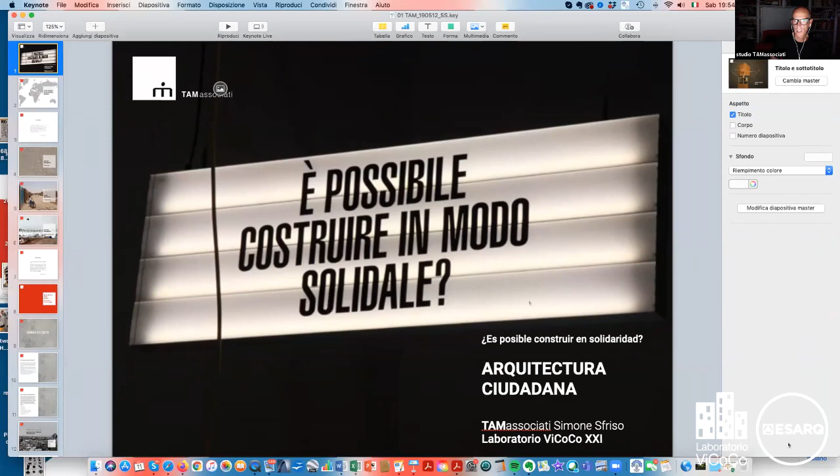Well, I can share my desktop. Okay, can you see my desktop? Yes. Okay, very well. So again, thank you for your kind invitation.

I am one of the founding partners of TAMassociati. TAMassociati is a firm based in Venice, Italy, founded in the late 90s. In the last 20 years we have worked mainly in the Global South, in the African continent, but also in the Middle East, Afghanistan, Iraq, and we have also done some projects in Ecuador and Nicaragua.

So we have worked mainly on what are called the global boundaries, las fronteras globales. But first of all, I would like to talk about what it means for us the word boundary, or frontera. I've tried to translate it in Spanish, I hope it is correct Spanish. But what is a boundary?

This is a quote of Massimo Arcangeli, who is an Italian intellectual and glottologist. He says that la frontera se divide, pero también es etimológicamente un lugar de intercambio. Se confina con alguien, ese alguien me une. Podré verlo y él podrá verme, y lo que importa es si estamos sobre el mismo nivel. No estamos confinados, de lo contrario sería un confinamiento, sino vecinos.

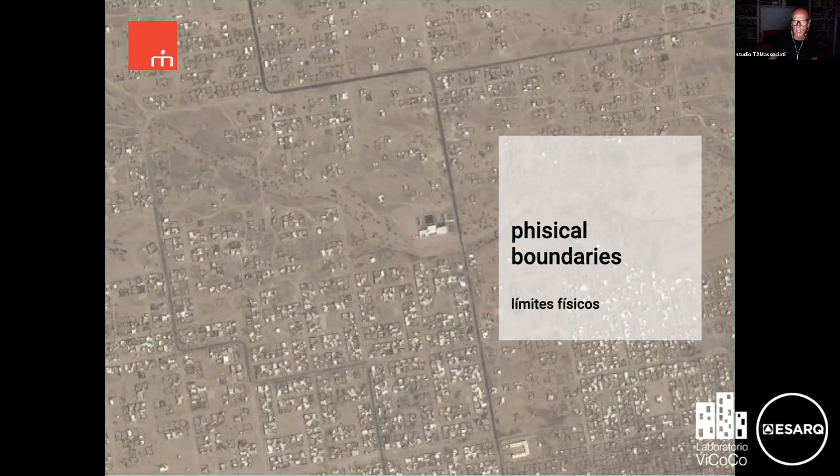When I talk about boundaries, I talk about physical boundaries, but mainly about social boundaries and also war-torn boundaries. We have worked in war-torn areas such as Syria, Sierra Leone, Iraq, places where all rights are denied to the communities, to the people.

So what is important is to try, with our work, to build bridges, to bring rights, to bring services, to bring an attempt of building the quality of life — the same quality of life that we normally achieve in our part of the world, in the north, in Europe — and to guarantee, through our social engagement, dialogue, service, and rights to the communities and places in which we are involved in our work.

We have worked mainly for NGOs, for pro bono associations, and so we have started this back and forth journey from the north to the south. It has meant for us a sort of relearning how to be architects, but also relearning how to be citizens, how to be involved with the community.

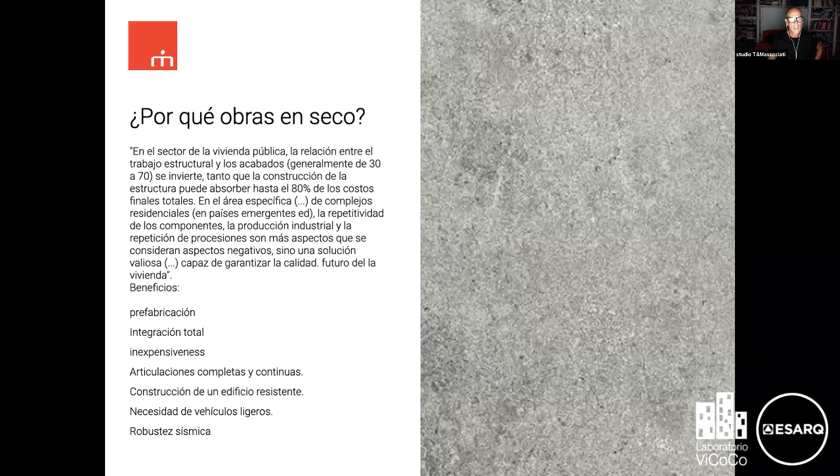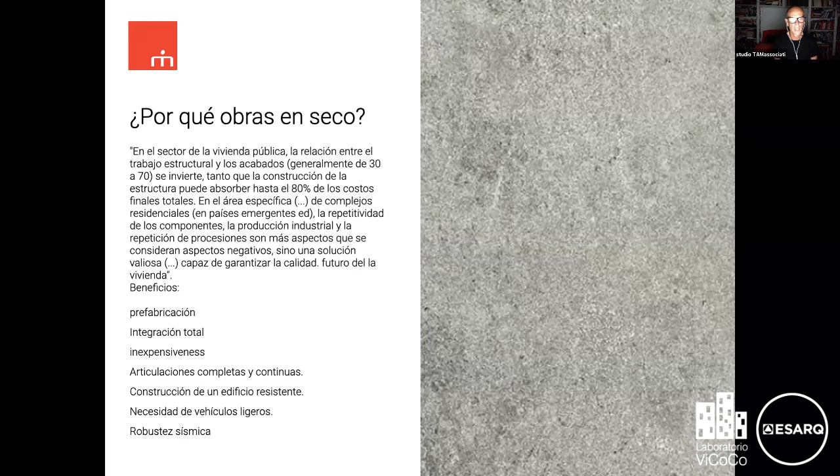So I've talked about prefabricación, integración total, inexpensiveness, la construcción de un edificio resistente, la robustez sísmica as well. It means that we can really try to give, using industrial production and the repetitivity of industrial components, effectiveness in our answers to the question.

This is an experimental research project for the reconstruction of a district in Kabun. Kabun is a district in Damascus, the capital of Syria. As you probably know, Syria has been shattered in the last six years by a civil war, and big parts of the country have been destroyed. Damascus, the capital, has also been a war-torn area, a war theater. Kabun, this district, has been hit hard by the war, by the bombs.

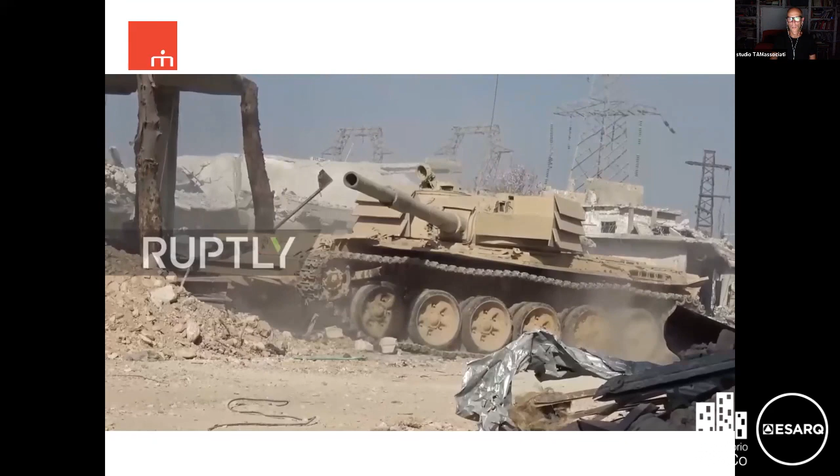So we have had to deal with huge problems of displacement, huge problems of refugees, persons who needed to go back to their city, to their neighborhood, as fast as possible. The attempt was to guarantee the same quality of life, the same feeling of genius loci in a place that has been completely destroyed.

This is why we have entitled this project 'Igual igual pero diferente.' It means that we have tried to learn from the genius loci. We have tried to start from understanding deeply how people were used to living—it was deep research about the typical Arab house, the courtyard house.

We looked at how to repurpose that typology also in huge residential interventions such as this, where we were asked to design an entire district. So we proposed a project based on possible variations, based on a basic model and a standardization of solutions, with the objective of developing solutions and strategies capable of transforming a very simple construction system into architecture.

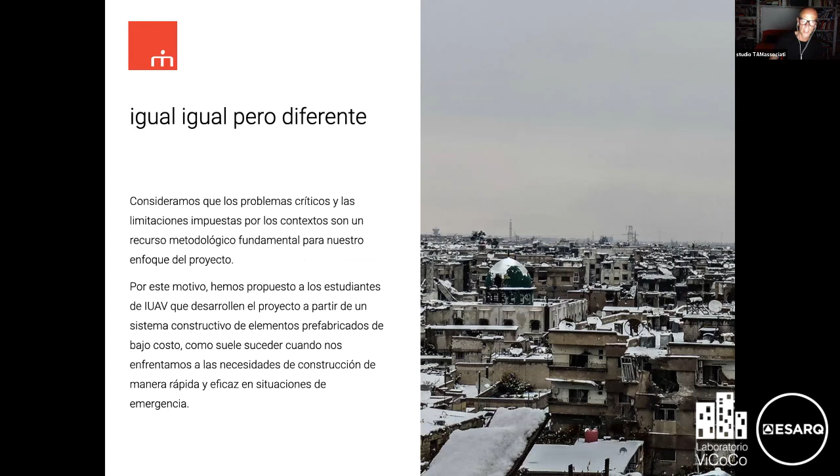We have articulated the project in 4 steps. The first step is the unit, the basic module of housing realized with prefabricated panel systems. Then the cluster, the aggregation of different kinds of modules of housing. Then the neighborhood, the aggregation of a certain number of clusters. And finally the district, made of 4 neighborhoods for a total community of 2,000 inhabitants.

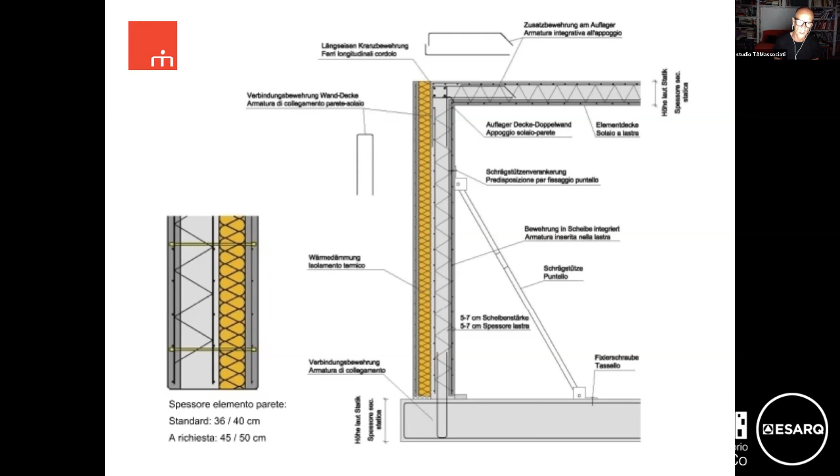We have standardized the thickness of the walls to give very good answers in terms of sustainability, solar radiation, and insulation. You have to consider that Syria is a place where in summer you can have even more than 40 degrees, but in winter sometimes the temperature goes down to 0 degrees. So you have a very wide range of temperatures from summer to winter, and you have to be very careful about the quality of building and insulation.

As you can see, we started with this basic model, 18 square meters, and from that we tried to assemble and combine different kinds of houses. Type A, 58 square meters, type B, 80 square meters, and type C, 120 square meters, for 2, 4, plus 1 people, and a bigger house, 124 plus 2 people.

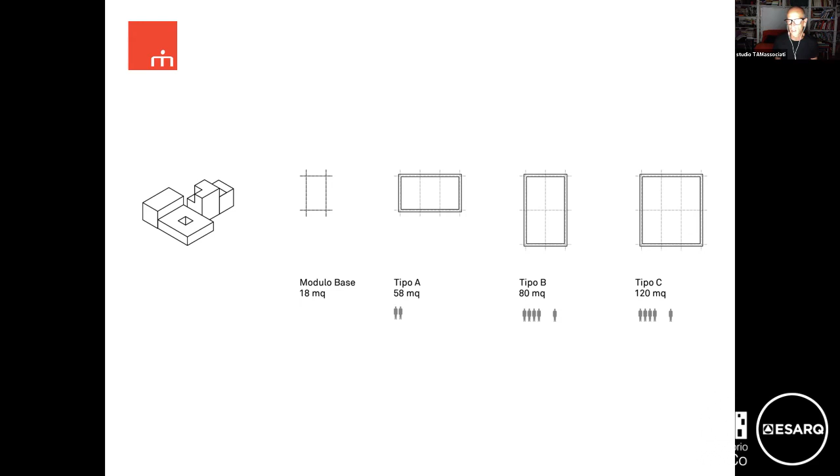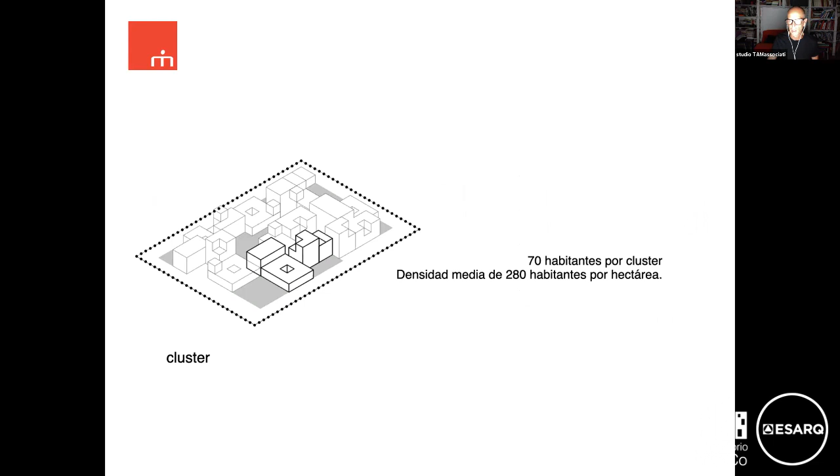So every cluster hosts 70 inhabitants. That means we have a medium density of 280 inhabitants per hectare. The attempt was to have a simple system, but the challenge was to build complexity, to build variety with a very banal, modular system.

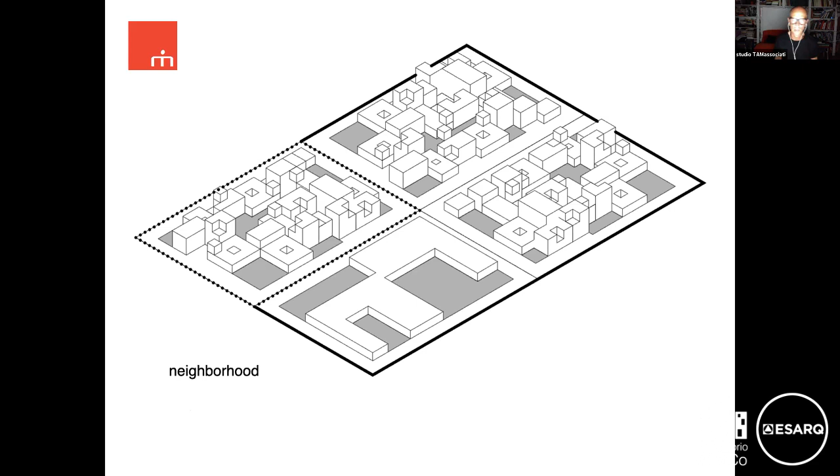So some instruments, the juxtaposition of different houses, were made in order to build richness and variety inside the neighborhood. We didn't want to build a boring place, a repetition of the same kind of house everywhere, but we tried to learn from the typical Arab kasbahs, and we tried to repropose a contemporary version of the Arab city, the Arab kasbah.

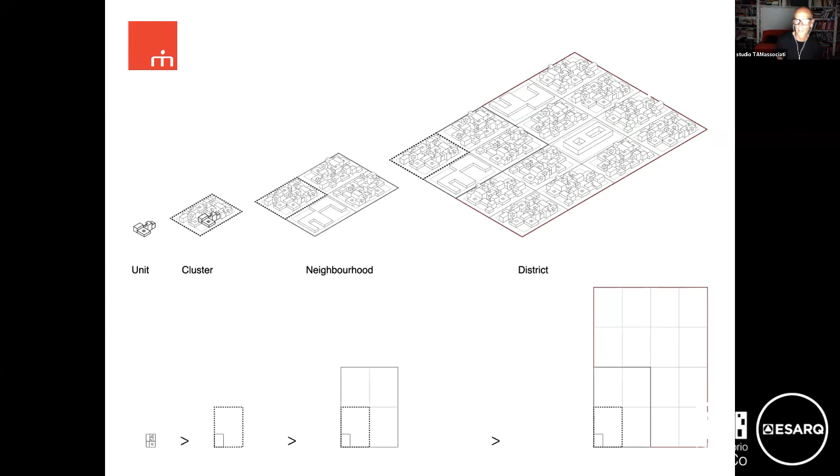So from the unit to the cluster, from the cluster to the neighborhood, and from the neighborhood to the district. I'm showing some schematic drawings. If you like, maybe in the next days I can send you some materials, some PDF files, if requested.

So now I'm showing you some variations, some possibilities of this aggregating system. Every house has its own patio. The patio is very important for the Arab culture because it guarantees the privacy for the family, the privacy for the women. So we have worked on different levels of open air spaces.

The intimacy and privacy of the patio, the semi-public courtyard where 5, 6, 7 units are facing, and in the middle of the cluster, the square, the more public space, a space for the market, for social gathering, and so on.

So, different solutions. This is a feasibility project for a pediatric clinic. So even for a public building, we have worked on the same principles: the dimension of the courtyard, the dimension of the patio, and the capability of the system to be replicable in different solutions, but also for different uses, for houses, but also for public buildings as well. This is another shot of the project.

This is another variation. As you can see, small windows in the walls facing the exterior, and big windows in the private internal patios, in order to guarantee privacy and intimacy in the houses.

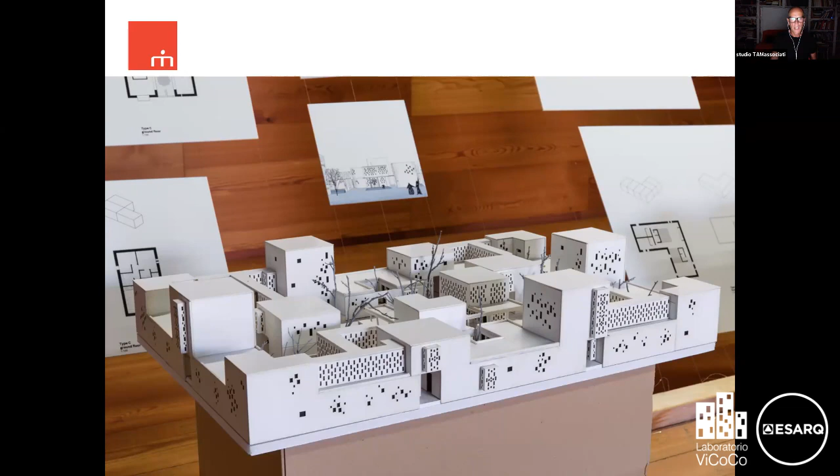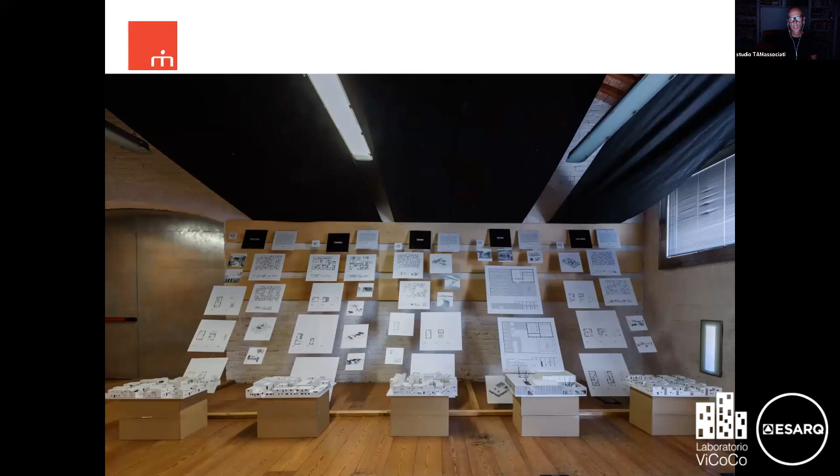Another master plan, we are changing social, physical, and also climate context. This is a social housing master plan in Yaoundé, the capital of Cameroon. Cameroon is in the equatorial area of the African continent. It is an emerging country, and the economy is growing faster, meaning there is a growing middle income class.

But there is also a huge demand for social housing for all the people moving from small settlements, from the villages, to the city. Again, the questions are really similar to the questions I talked about in the previous project. In this case, we have worked for an Italian building company and for the Ministry of Social Housing of Cameroon.

We were asked to design a master plan for 10,000 housing units, a new town, une ville nouvelle, for 45,000 inhabitants to be built with prefab systems.

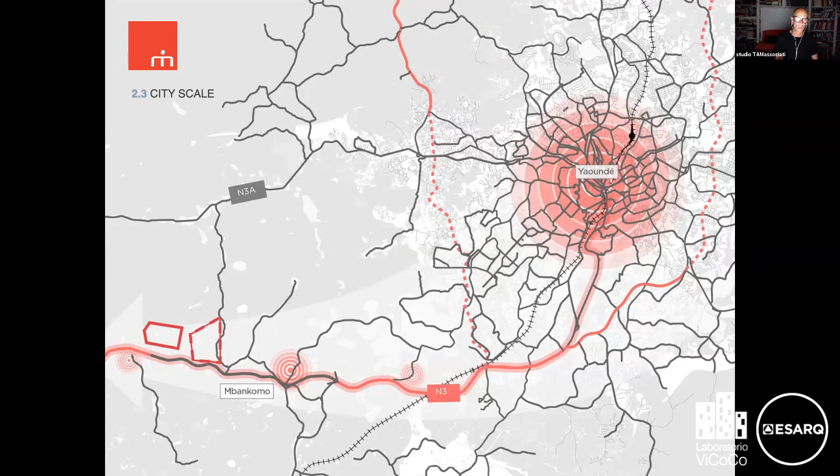The idea of the ministry is to build a series of small satellite cities connected with a strong public transport system. So the idea is not to build anymore in the city, but to build small places connected with agriculture, connected with the environment, connected with nature. So the objectives are all connected one with each other.

So this idea of creating economic opportunities while connecting public and private actors to improve a diverse and vibrant community, integrated with existing nature, and creating a safe, secure, and prosperous place for life.

We have worked on 3 scales: the scale of a neighborhood, 1,000 units, with a series of public services. That is very important. So the primary schools, the libraries, the secondary schools, churches and mosques, and sport fields, and public parks.

At the scale of a district: district parks, sport complex, banks, bureaus, offices, cultural centers, and so on.

And at the scale of the whole community, the public spaces, the public buildings for culture, such as cinemas, theaters, secondary schools as well, city libraries, and so on.

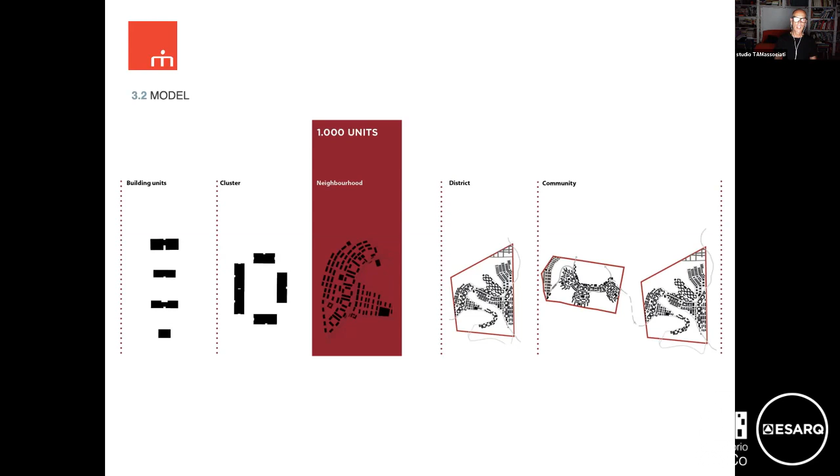So we have worked on the aggregation of building units in order to build courtyard clusters and to bring together a sequence of cluster units in order to build the neighborhoods, following the characteristic of the terrain.

The plot is a hilly place, so we have followed the line of the terrain, the line of the landscape.

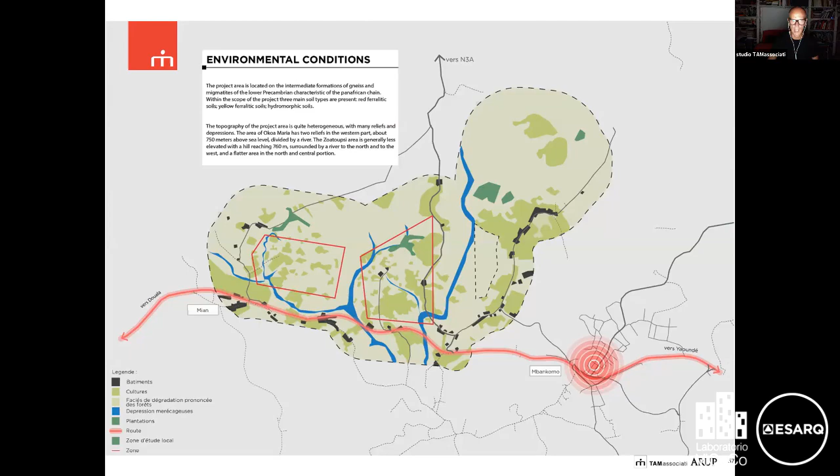We have divided the whole complex into two semi-neighborhoods, two petites villes, two small cities. One, on your left, has been developed around a hill, and the second one developed around the productive area that will be dismantled after all the housing system is realized and replaced with a public park area.

So as you can see, different kinds of services are placed in the strategic visual areas of the two complexes.

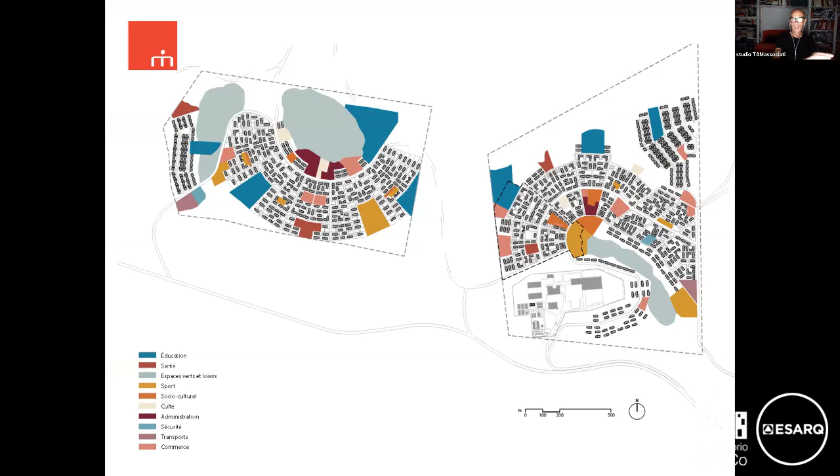So the main question in this case was how to combine quality, the question of time in construction, cost effectiveness, and the dignity of the inhabitants.

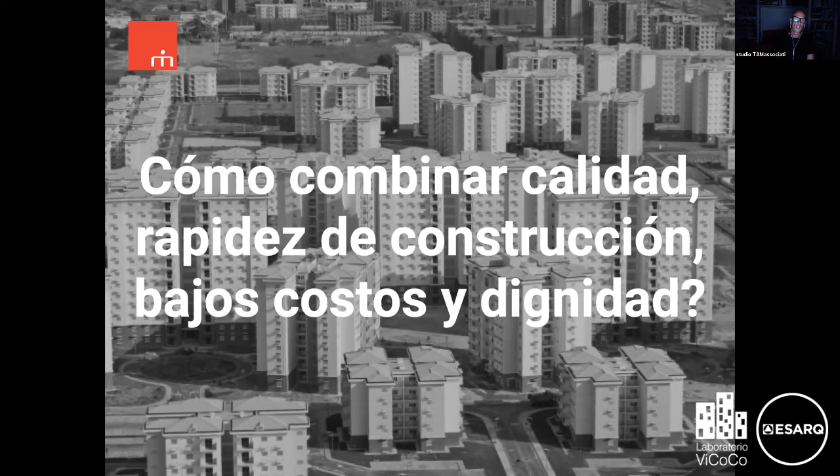This is a photograph of a typical housing neighborhood built by big Chinese companies in Africa. As you can see, they have definitely taken typical housing towers from the peripheries of Shenzhen or Beijing, and it seems they've been parachuted into Africa with no relation to the place, to the requests of the people, to the idea of housing that Cameroon people have, what they expect from a house and from a neighborhood, what they expect in terms of their own house, but also the quality of the public spaces.

So we have worked with instruments of architectural composition. We started with a very banal, simple structural grid, and we articulated it with an empty space in the middle. This means we always try to put together the public space and the private space of the house.

So again, this idea of a courtyard, building around an empty space, a semi-public place. The articulation of functional modules, light systems for the facade, a cost-effective system, but also morphologic adaptation to the landscape and functional adaptation. That means you can start from a basic model and then add other modules when and if needed.

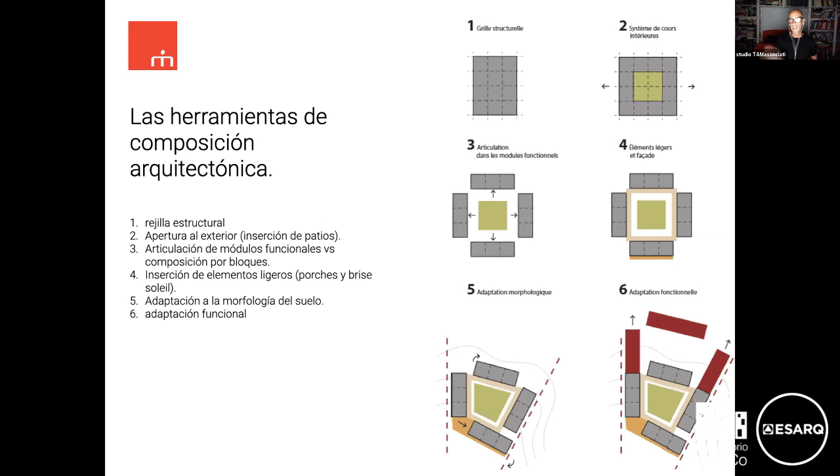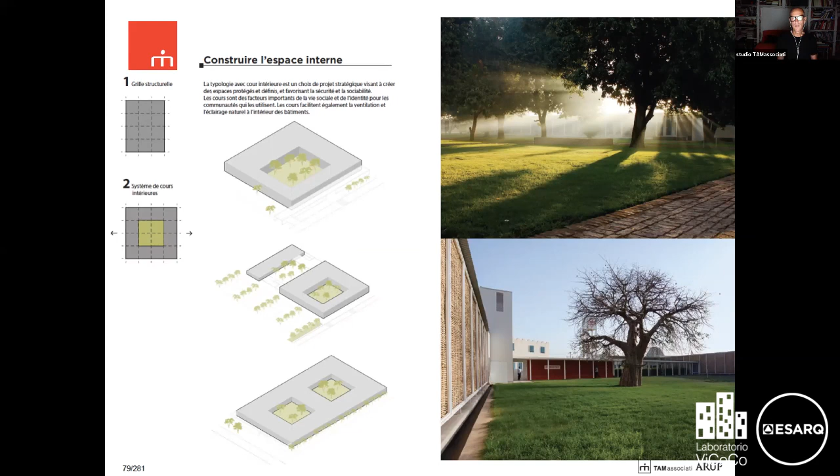In many projects, we have experimented with this idea to build around an internal space. These two pictures show the upper photograph, a housing project in Sudan, and the second photograph, a pediatric clinic in Darfur. In the very middle, there is this huge tree, a sort of cosmic tree, a symbolic center, and it seems to us that we have built all around this symbolic center represented by the tree.

Building houses is more like building public spaces, spaces for gathering, and creating systems for relations of people. We try to achieve this with very light and cost-effective architectonical solutions, such as porches, light porches built of metallic grids, and bamboo shading systems, brise-soleils, in order to realize with very simple and fast systems, spaces for markets, spaces for communities.

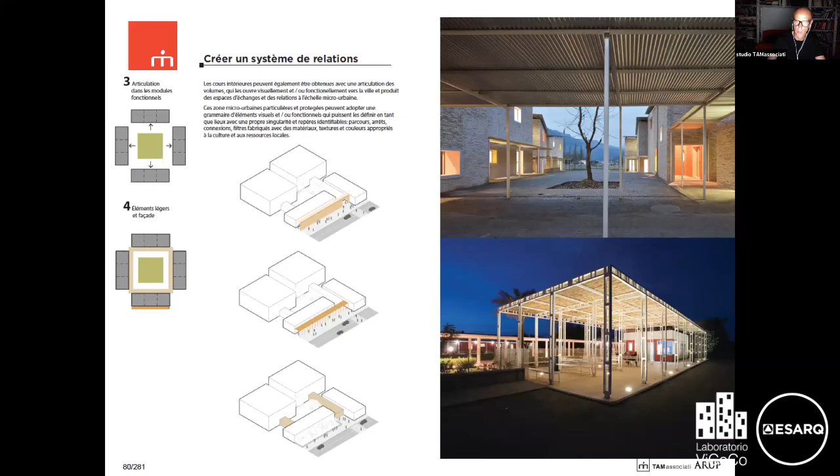It also means you can just start from a basic system, and implement it, adapt it in a mid or long time as well.

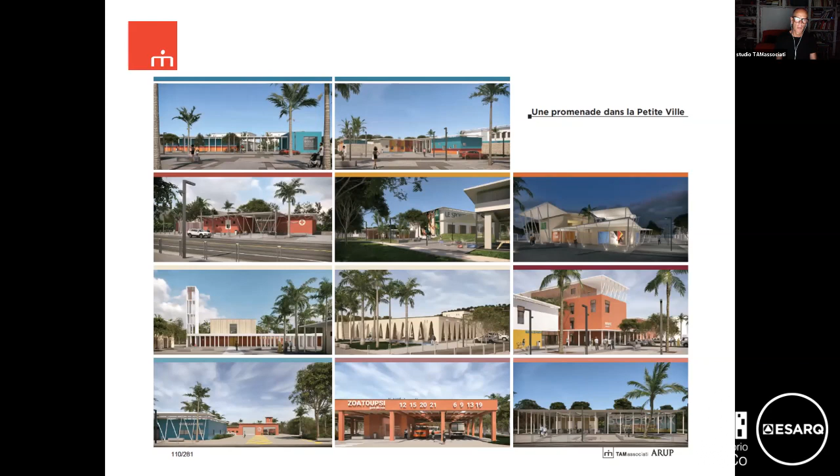Well, this is an abacus. I'm not showing you the houses here today, but I'm showing you the public buildings, because what is important for me to say is that with the same constructing system I talked about in the previous project, you can achieve a variety in terms of shapes, but also a variety in terms of functions, using very cost-effective and simple systems, working with colors, and working with filtering spaces that give a sort of insulation between the external public streets and the internal spaces.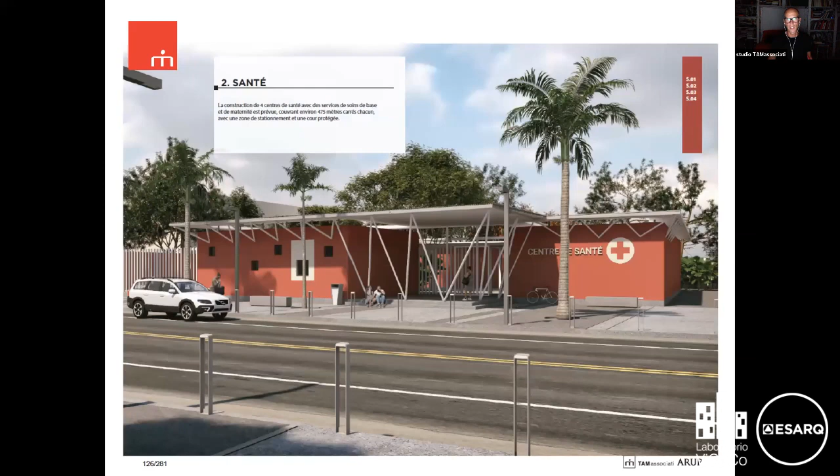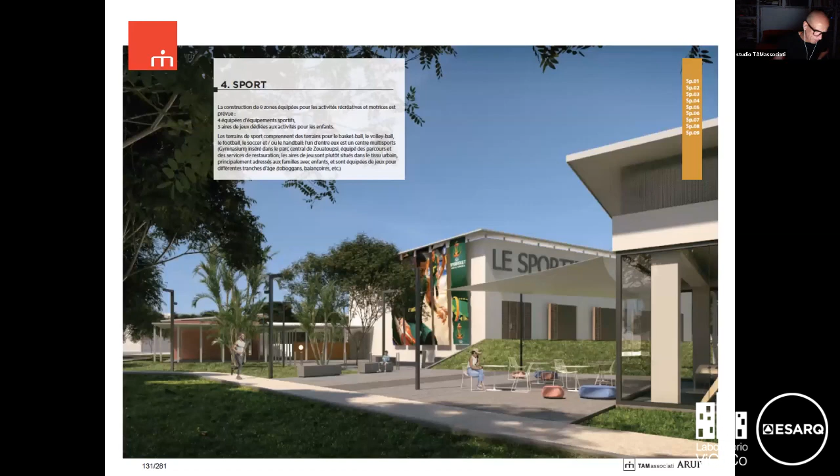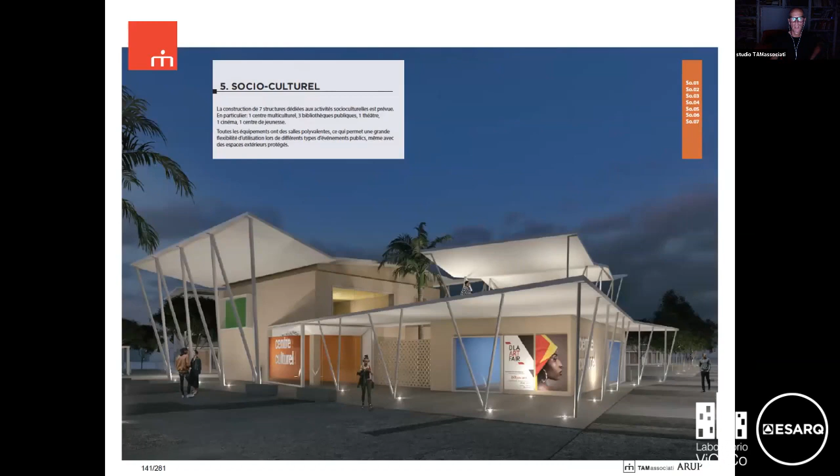I'm going to show them very fast. This is a primary school, a pediatric clinic, sporting fields, sporting functional systems, gardening and parks, social and cultural spaces, and also sacred spaces, such as churches, Catholic or Anglican, or Muslim mosques.

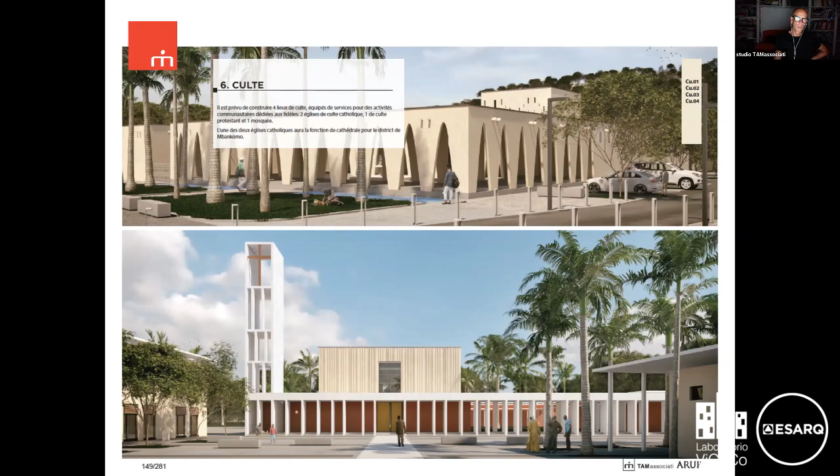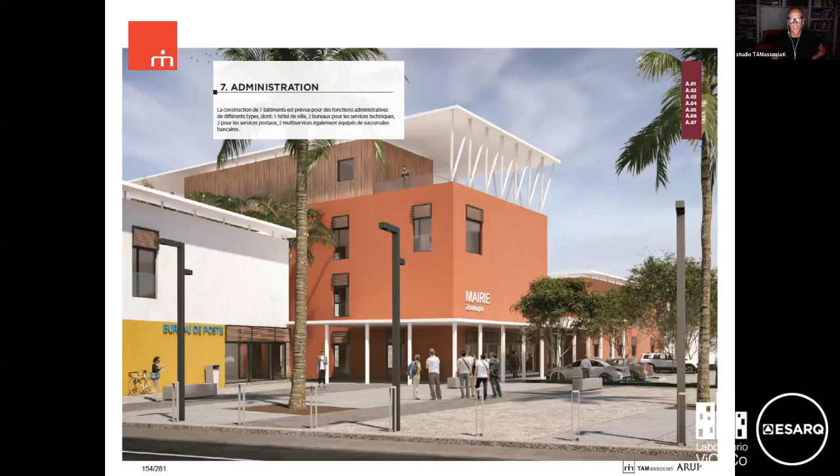As you can see, different shapes in respect of different faiths, but both built with the same basic prefab building system, or a public works office administration building, or transport stations, commercial centers as well. I'm going fast here because otherwise I'm talking too long.

Ladrillo, or earth, I can say. I'm going to show you fast two projects. This is a project built in Uganda. Our commitment in this case was with a filmmaker.

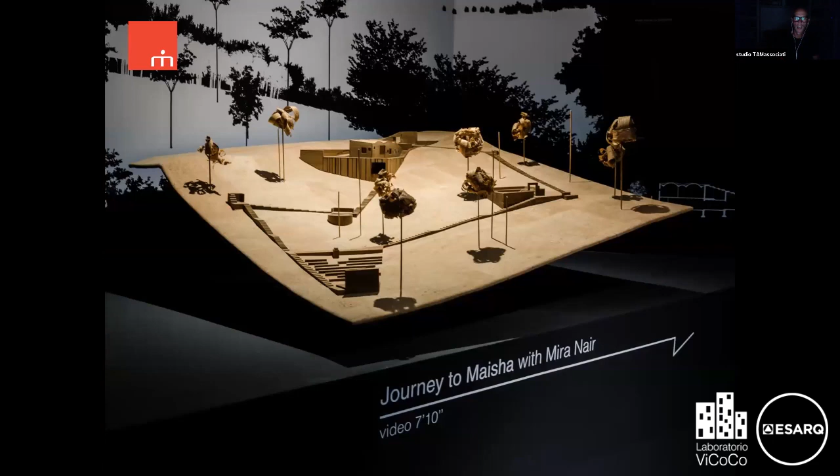Mira Nair is a very well-known Indian filmmaker. She founded, more than 10 years ago, a school for younger filmmakers in Kampala, the capital of Uganda. The mantra of Mira Nair is, if we don't tell our own stories, nobody will. This means that in an emerging country such as Uganda, economy is important, but preserving and improving the culture of a place is also as important as improving the economic conditions of the people.

This is a very small school with public open air spaces in a didactic garden. The first act was to build a very small factory for the production of the bricks. We used the earth of the hill, the earth of the plot, transformed it, and realized the bricks. With the bricks we realized everything: the walls, the ceilings, the floors, the open air paths, and so on.

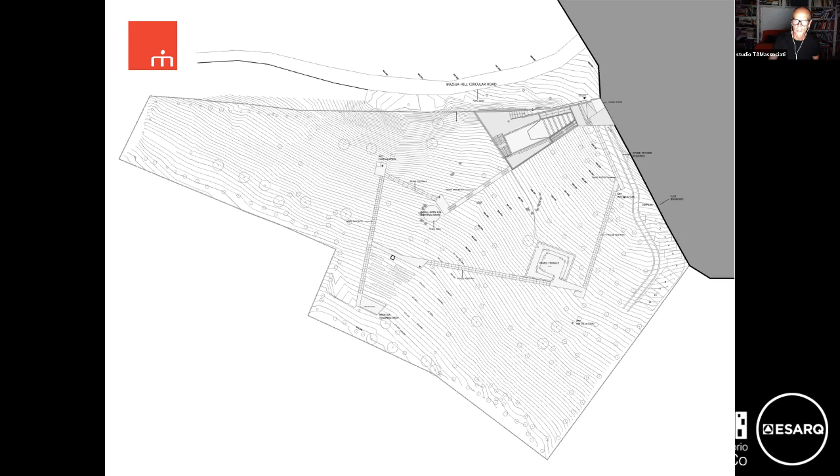So it is, I can say, not a kilometer zero building, but more like a meter zero building, because the earth of the place has been transformed into the building system we used for construction. It is a work in progress. We have already realized the external spaces, these open air classrooms.

Well, I also have a short video. I don't know if you can hear the audio. We can try. Can, okay. Well, I can go on.

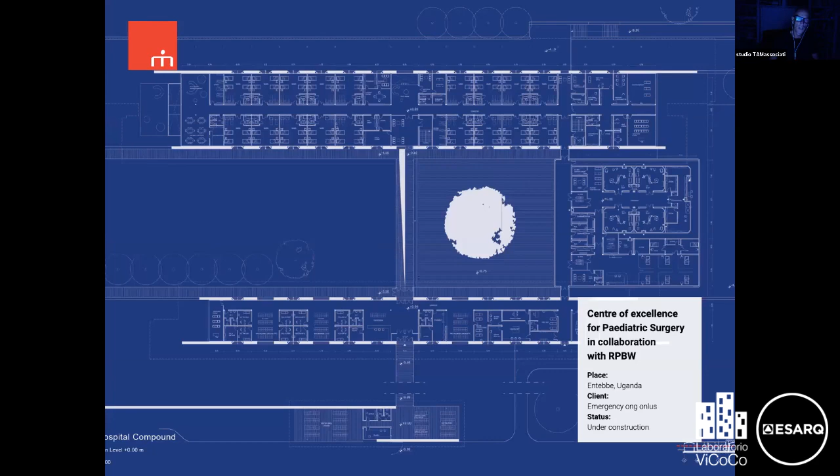About earth, we have experimented with earth as a building material in an experimental healthcare project that we have already realized, again in Uganda. It is a center of excellence for pediatric surgery that we designed in collaboration with Renzo Piano Building Workshop, and all the walls have been realized in Pisé.

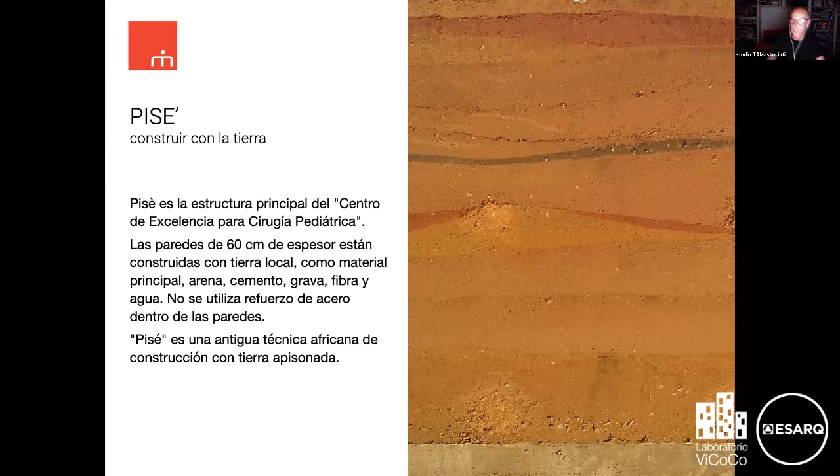I don't know how to say Pisé in Spanish, but anyway, it is an antique African building technique, involving construction with, I hope it is correct, la tierra apisonada. Uganda is in the very middle of the African continent, and it is a huge complex, a 100-bed hospital. At the request of the NGO Emergency, we worked with our commitment.

The first requirement was that it had to be, again, really cost effective, but at the same time we had to offer the same quality of healthcare in this hospital that we are normally used to achieving in our country, Italy, but also in Europe. So it means it is also a political act, because it follows the idea that we don't have to have a serious healthcare in the north of the world and a lesser healthcare in the south of the world.

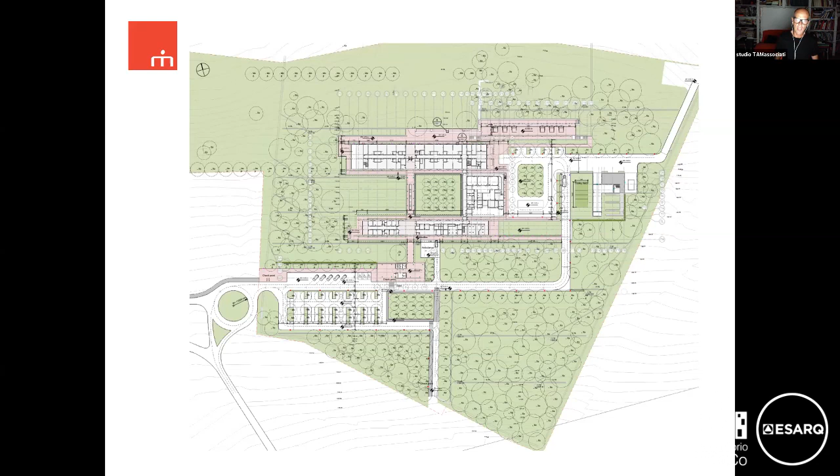And so again, we worked with the earth, and the earth of the place, the excavation for the foundation, has been the first place where we found the materials to be transformed in order to build the hospital.

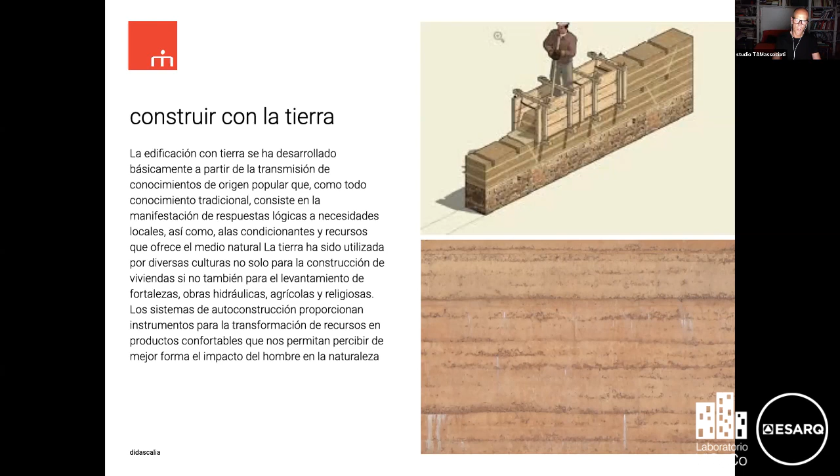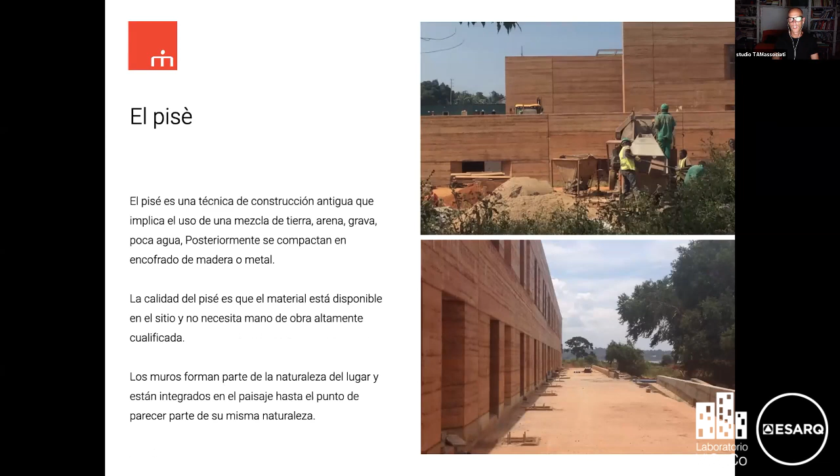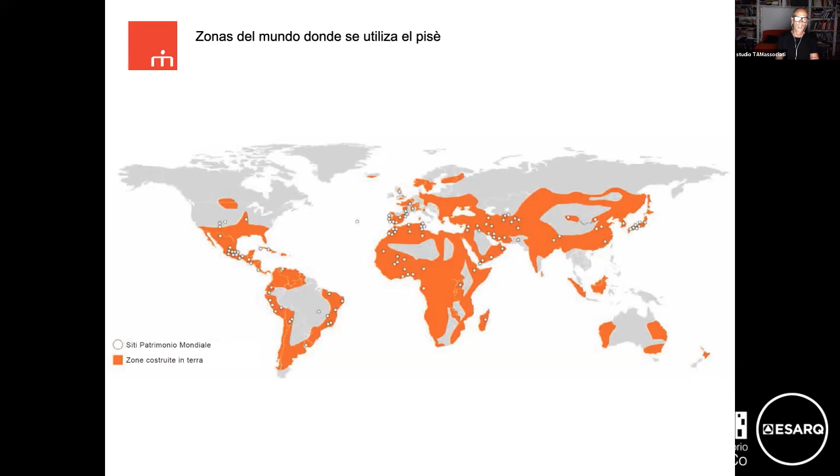Il Pisé is normally used for very small and simple buildings in Uganda, and this was the first time it was used for a double floor building, for a big hospital building. Construction with earth, with rammed earth, is normally used in Africa, in Asia, and in many parts of Latin and Central America as well.

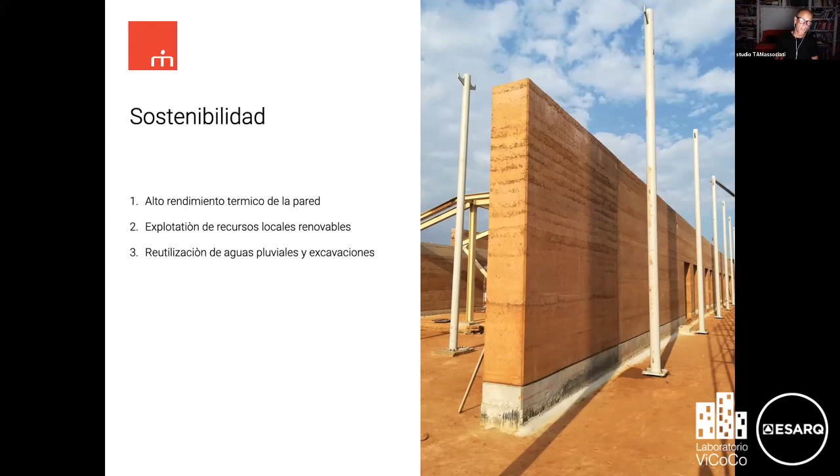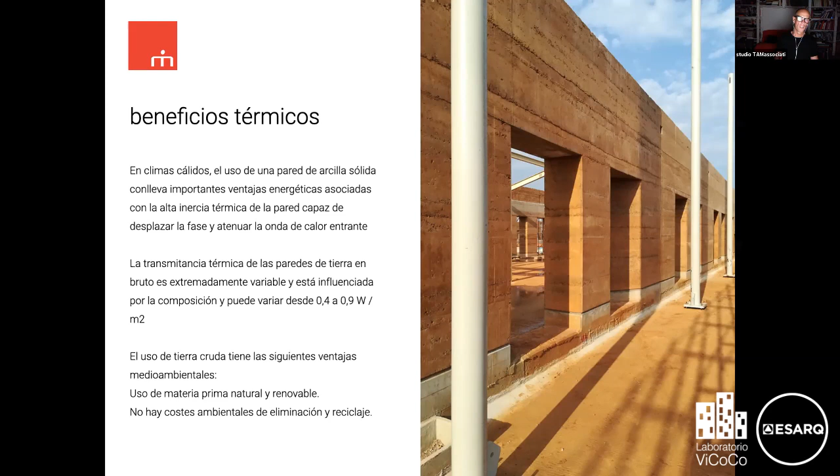About sustainability, building with earth gives very good answers in terms of the thermal performance of the wall, in terms of the possibilities to build with cost effectiveness, and so on. The thermal benefits, the thermal capacity of massive buildings, of huge walls, give very good answers in terms of thermal transmittance and so on.

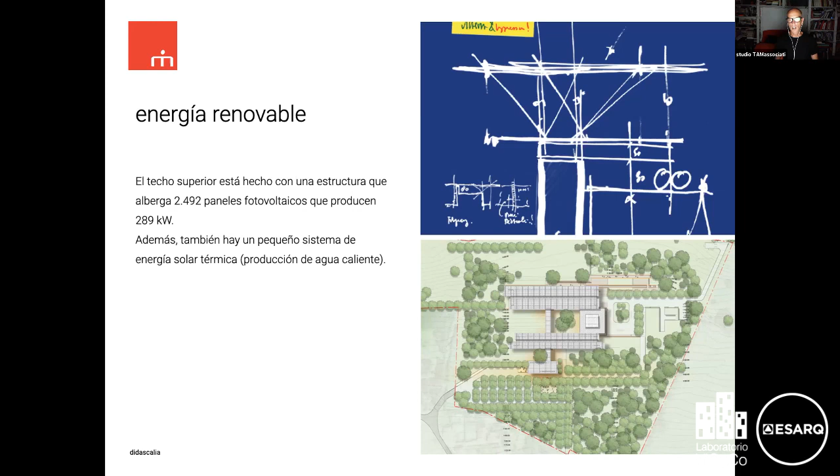We have also worked with renewable energy. All the roofs have been covered with photovoltaic panels. We have a huge photovoltaic system that gives us a bit less than 300 kilowatts. That means all the electricity needed for the running systems, for the MEP systems of this building, are guaranteed by this huge photovoltaic field.

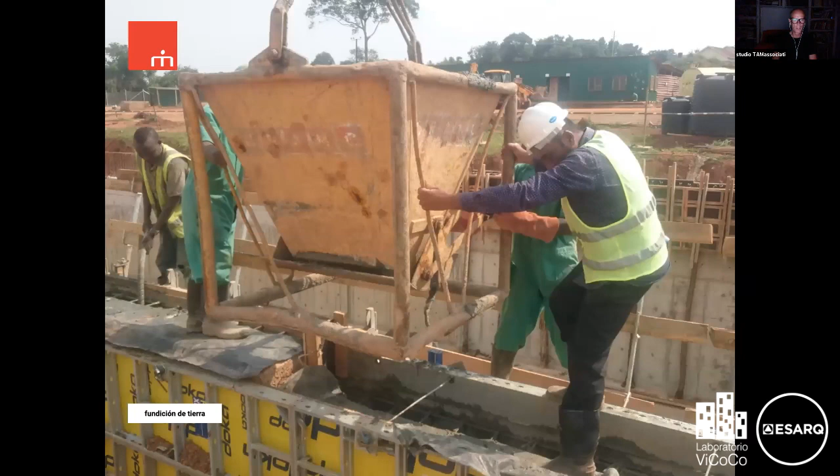So the phases of the building: excavation, reuse of the earth, selection of the earth, formwork, a basic schematic section of formwork, casting of the earth. It's basically the same constructing system as reinforced concrete, but here we don't have concrete, we only have earth.

Drying time means we need about 2 weeks to wait before the wall is ready to be built over with other layers of rammed earth.

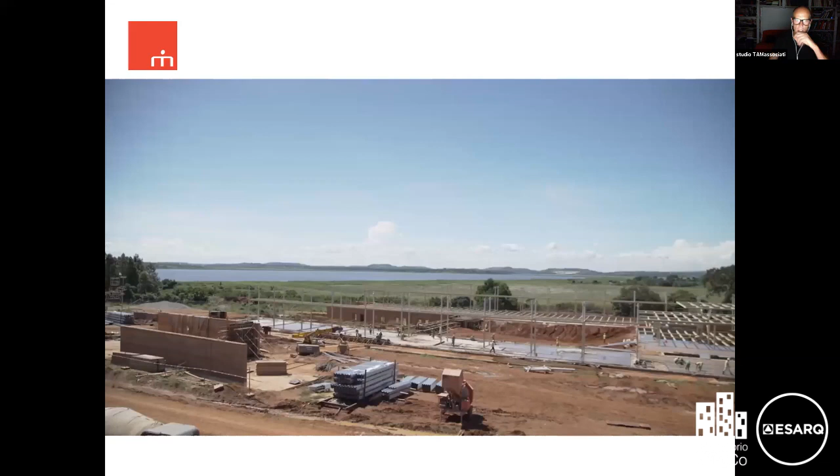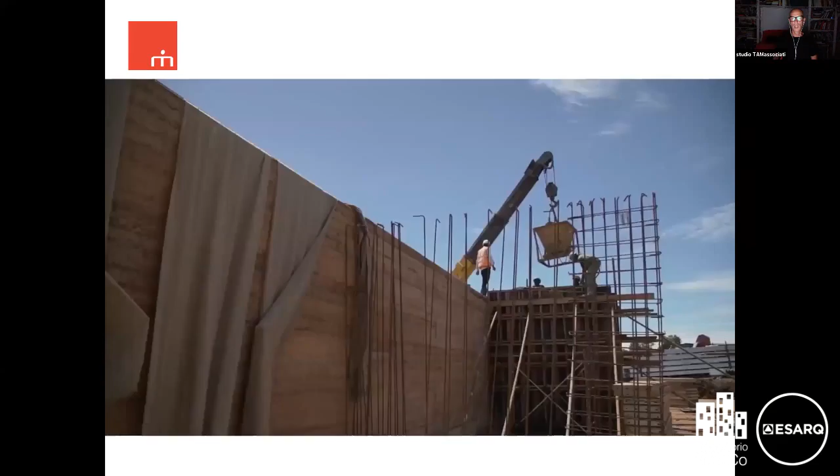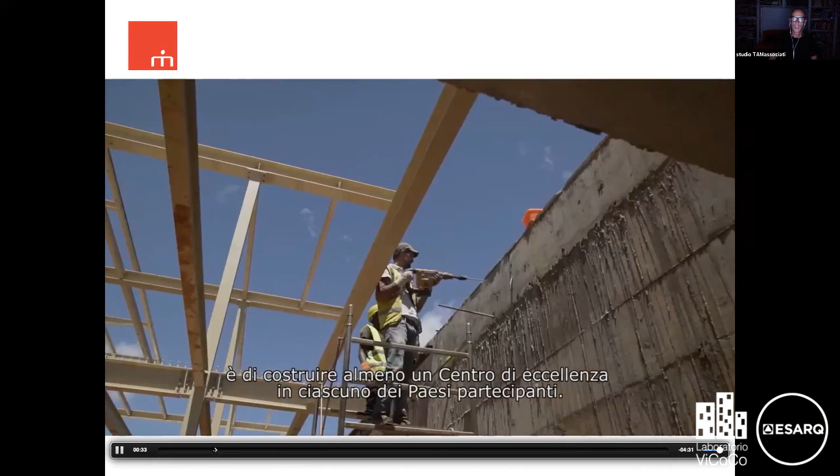I have a video. Unfortunately you cannot hear the audio, but I'm going to show you just a little part of it while I keep talking, so I can go a bit faster. As you can see...

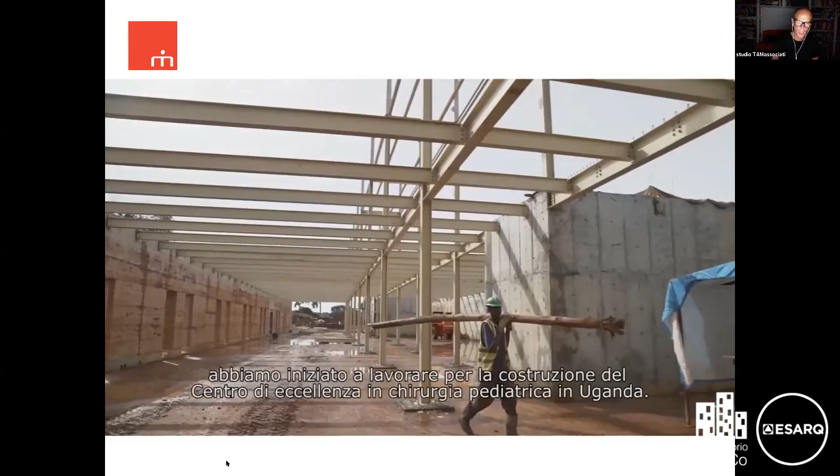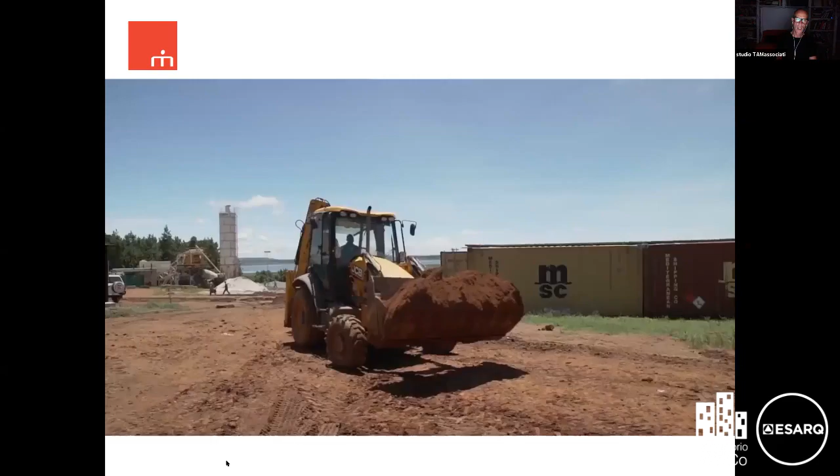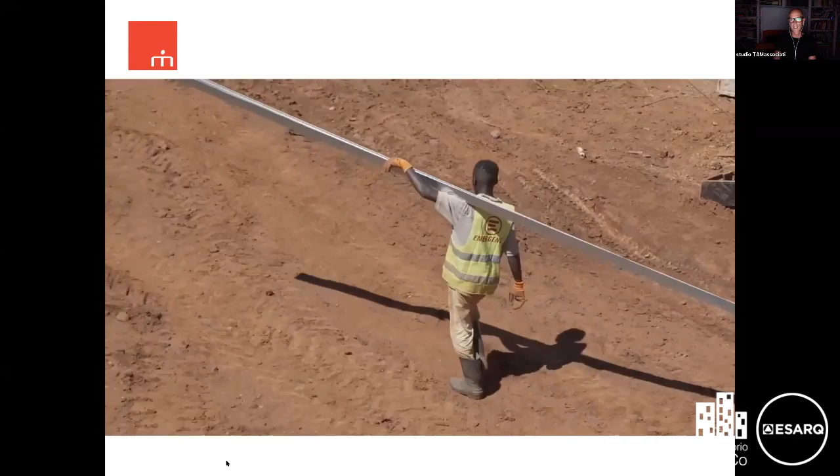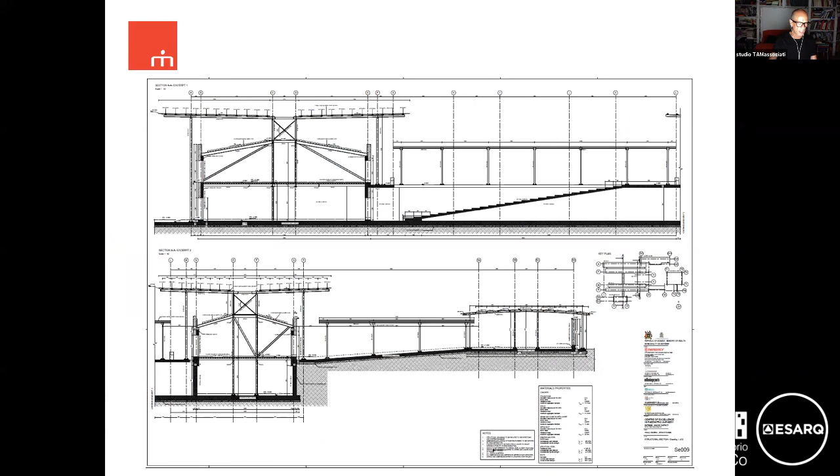As you can see, the constructing system and building design are really simple: vertical walls in rammed earth, horizontal ceilings in light steel systems, and dry construction systems also for the roofs.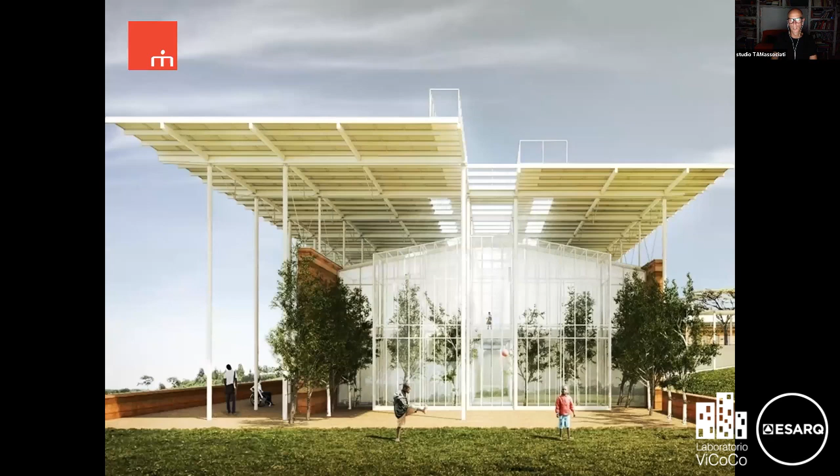I'll go a bit faster. This is a rendering of the hospital and some photographs of the building site. At the moment it is already finished, and it is already open.

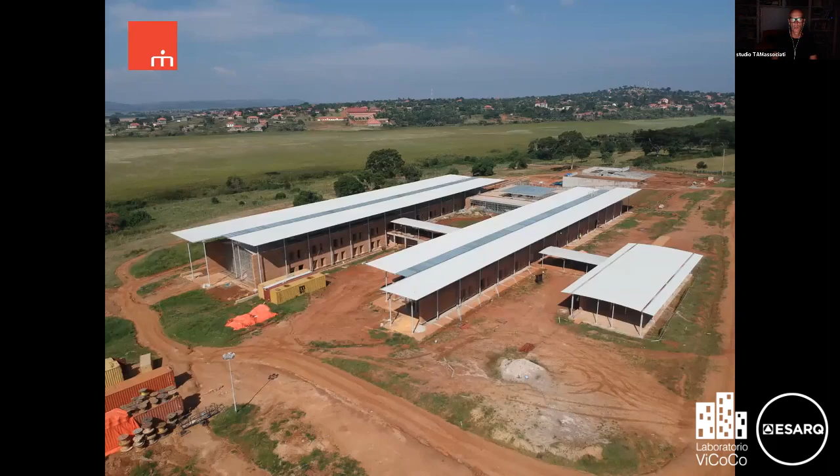I'll finish with a project realized in wood. We have also experimented with wood here in Italy in this back and forth journey. This project is important for us because we found something about what we learned working in the global south, working in Africa, and how this lesson has been important to relearn how to be architects also in Italy, also in our part of the world, in terms of bringing simplicity, bringing cost effectiveness, and bringing quality without using very expensive, sophisticated, or complicated building systems or forms in architecture.

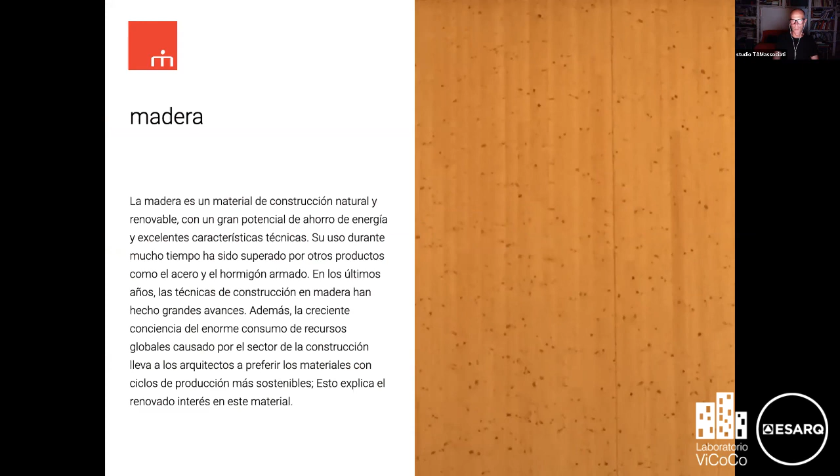In this case we have worked with cross-laminated wood, big wooden panels realized with pine wood, which is the most economic wood you can find in Italy. It was a reconstruction of an existing church, built in the peripheries of Viareggio. It was a prefab church.

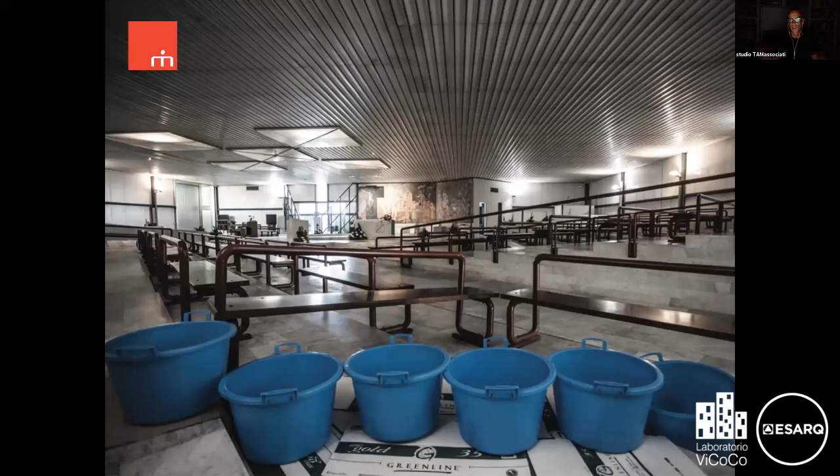It was really at the end of its life, so we had to demolish the existing structure and rebuild it. It was an architectural competition, and we won it, then designed the detailed project and followed the building site.

Again, we tried to work starting from an empty space, the central space represented by the courtyard that connects the sacred space of the church and spaces for didactic activities, for local associations, and the house for priests as well. Everything turns around this center represented by the patio.

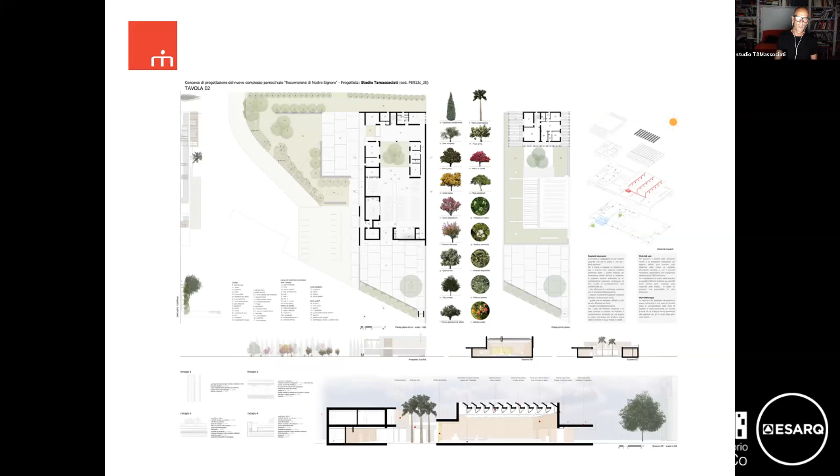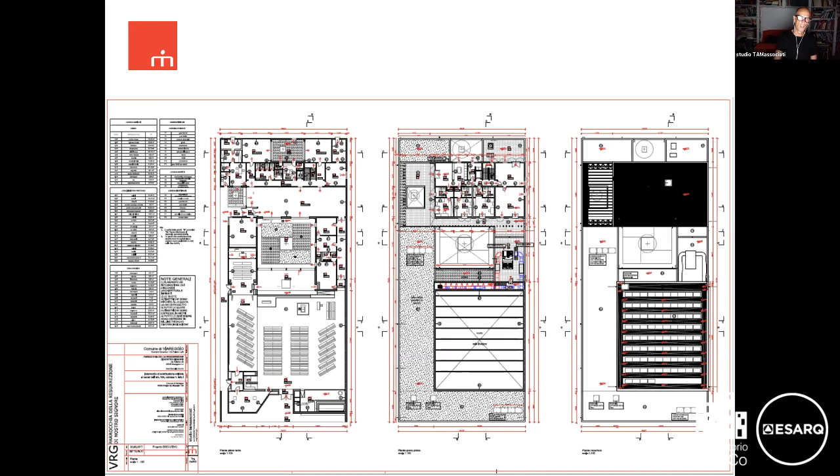When you work with wood, you have to be with a prefab system. You have to be really precise during the design phase, because all the panels are realized before, and then you bring the panels and you build them just like a sort of Lego system. I can go fast here anyway.

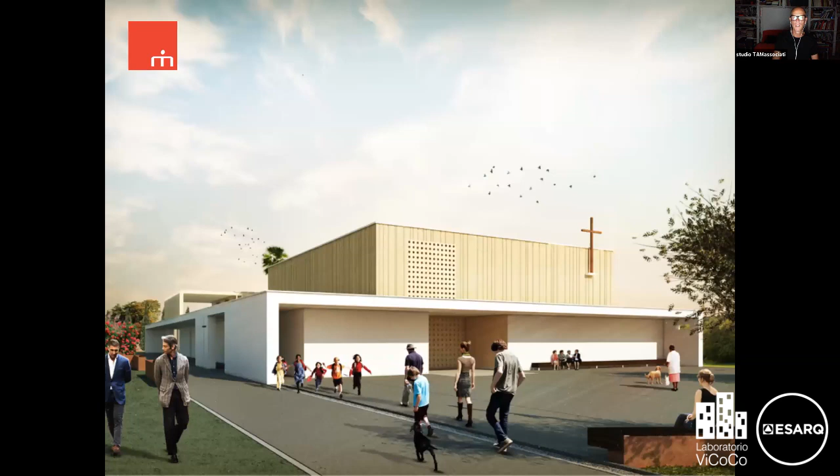In this case, the design phase is really, really complicated. But this is how we have tried to transmit this idea of simplicity to the local community. It was an idea of, yes, demolishing the existing church, but in a way it was a sort of refurbishment of the form they were used to recognize as their own church.

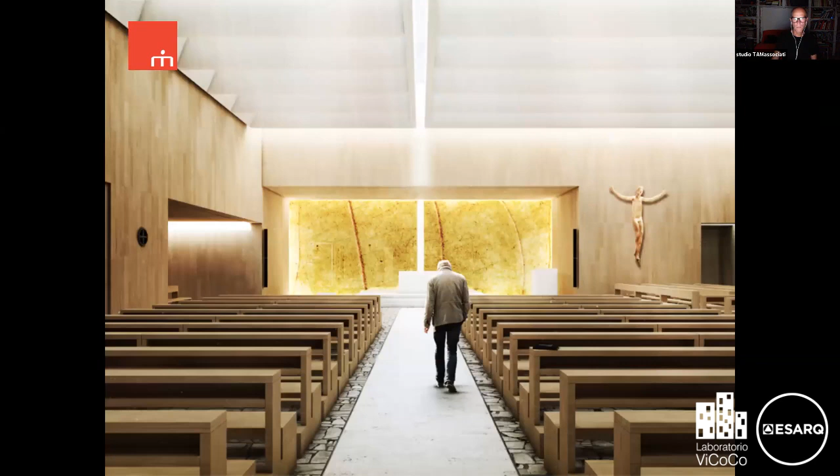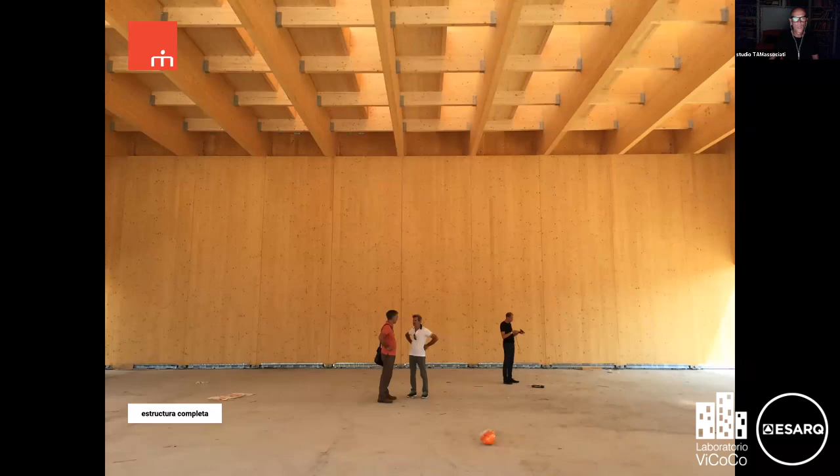The renderings of the competition, some photographs of the building site, the foundation system, the assemblation of prefab, huge prefab wooden panels, as you can see, and all the structure is built in wood. So the wood has been used for the vertical walls, but also for the roofs, for the sheds, the ceilings as well.

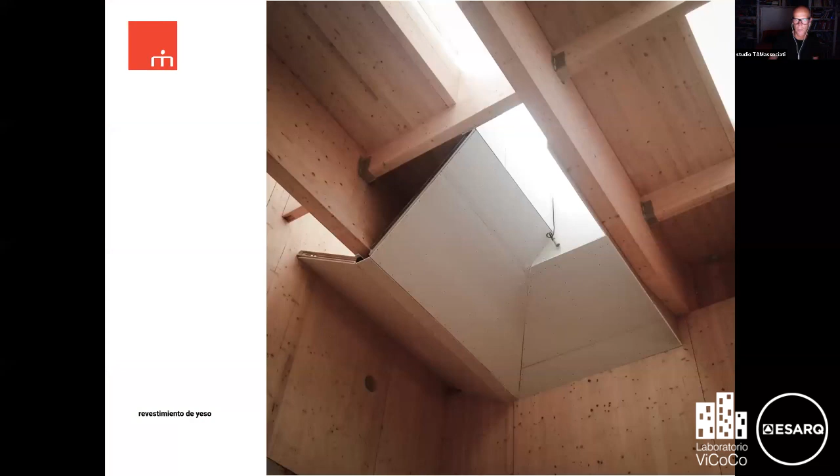Gypsum for the finishing of the sheds of the wall area, and some photographs of the sacred space with, I can say, this very soft light coming from the north. This is an industrial light in a way, like the shading system of huge industrial buildings. We have used this very simple system, redesigned it, and used it for the church as well.

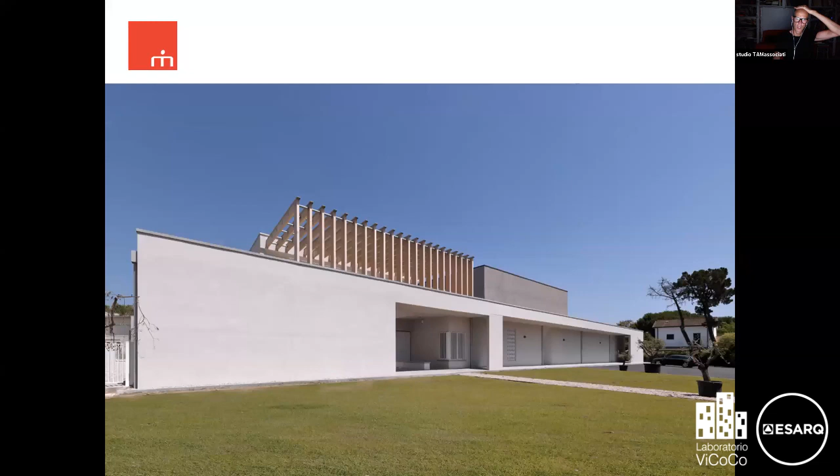Some photographs of the days of the inauguration of the building. The portico, the two porticos - this is the main portico with the main entrance to the church, and the portico that brings you to the social center behind the church. This is the entrance to the social cultural center behind the church. Some visualizations and photographs of the sacred space of the church.

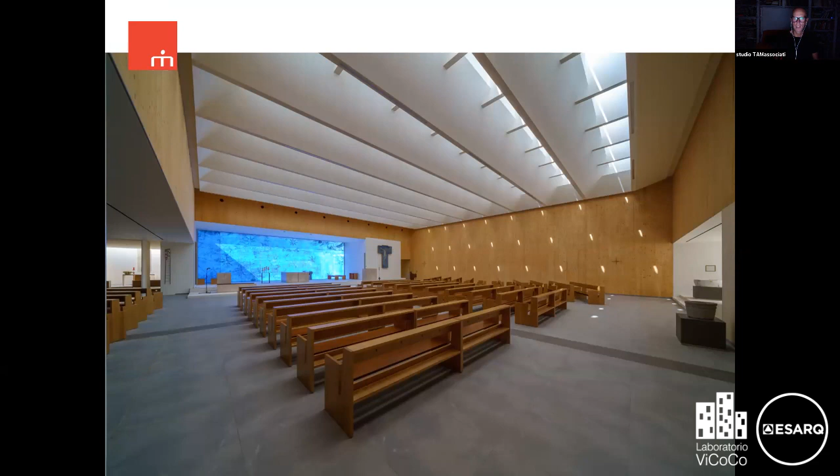As you can see, we have tried to work on this idea of democratic light. We didn't want a dramaturgic light coming from some specific spaces, but you can find the same light in all the parts of this huge 25 by 25 room. This is the baptistry space, and some pictures of the ferial chapel.

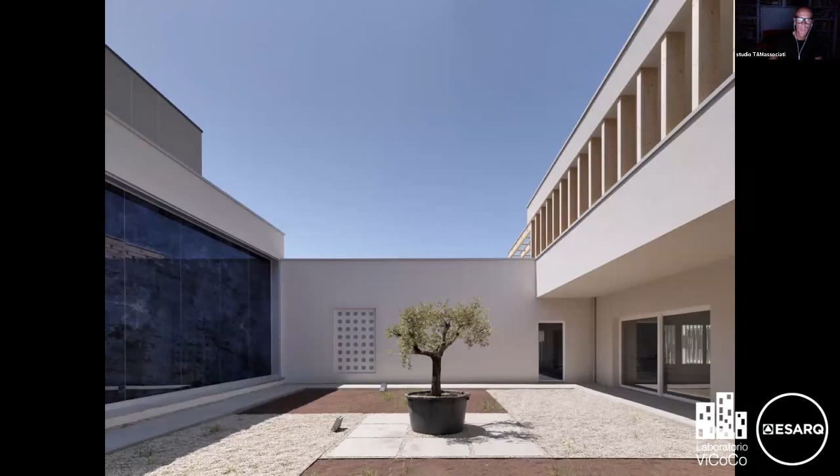The patio, and important for us, the tree - an olive tree that will be planted in the symbolic center of the complex - and the day of the inauguration. So some conclusions, very short conclusions. I will read the conclusions in my terrible Spanish.

These are two quotes - in Spanish, citas - from two master architects of the 20th century. Giancarlo De Carlo is a great Italian architect. I will suggest you maybe find out some projects of De Carlo - we consider them one of our masters. Especially when Giancarlo De Carlo says that el esfuerzo por organizar y dar forma al espacio físico es una necesidad urgente y una pasión humana. But at the same time, Oscar Niemeyer says that la arquitectura es un pretexto, el ser humano es importante. Architecture is just a pretext. Important is a human being. Thank you for your attention.